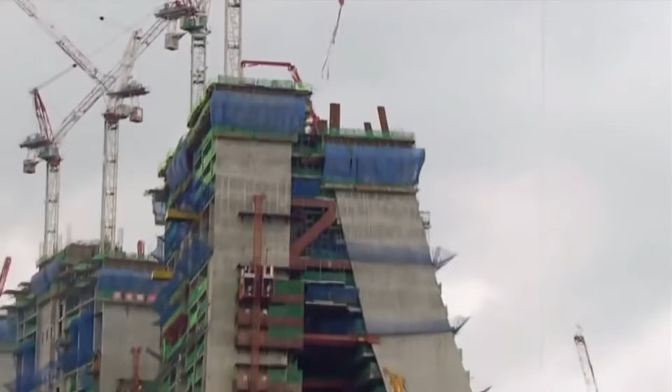During the construction of Marina Bay Sands in Singapore, engineers had to face a challenge that they had never imagined. According to the building design, a sky park was going to be built on top of 3 towers, whose size was supposed to be larger than the US Navy's Nimitz aircraft carrier.

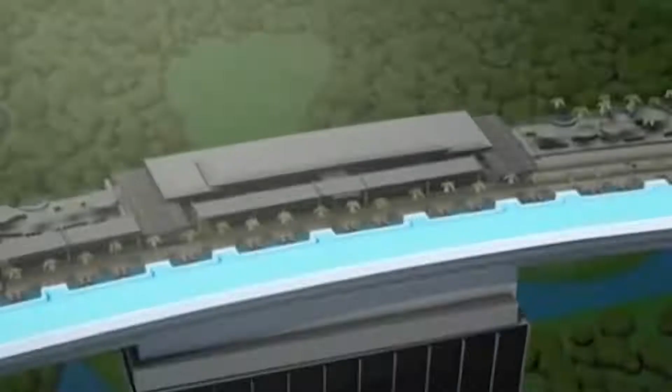And when it was time for the construction of the sky park, engineers found a major fault in the building design. The fault was that the 3 buildings might swing up to 200 millimeters during a tornado. And if the sky park was built despite this fault, then the swimming pool filled with 15 lakh liters of water might get cracked, and the destruction that it would cause is unimaginable.

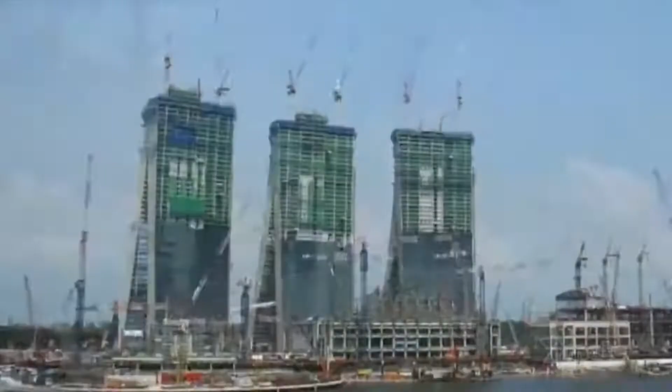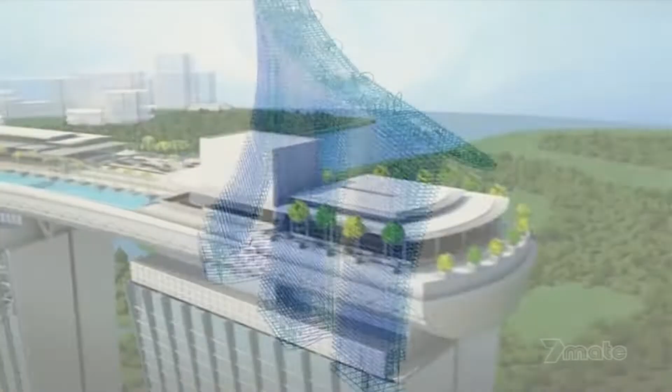On the one hand, years of hard work and millions of dollars were spent on this project, and on the other hand, dropping the idea of the sky park would be like compromising the beauty of the entire structure. They needed to find a solution which would keep the sky park safe despite the swinging of the building during strong winds. This was such a serious issue that the entire construction and architecture team was anxious.

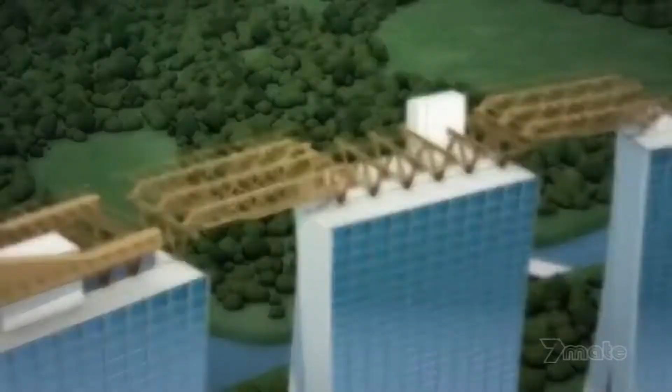But a miracle happened. Singapore is a country which has only one city, and that is Singapore. The entire country is so small that it is slightly larger than the Indian city of Mumbai and a little smaller than the Pakistani capital Islamabad. Singapore's Marina Bay Sands is one of the most complicated construction projects in the entire world, and that's why it is called an engineering masterpiece.

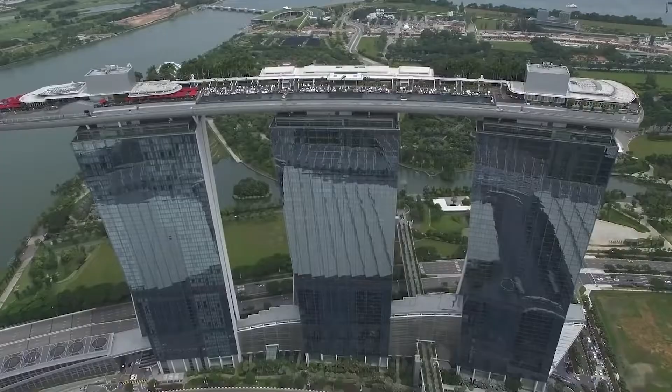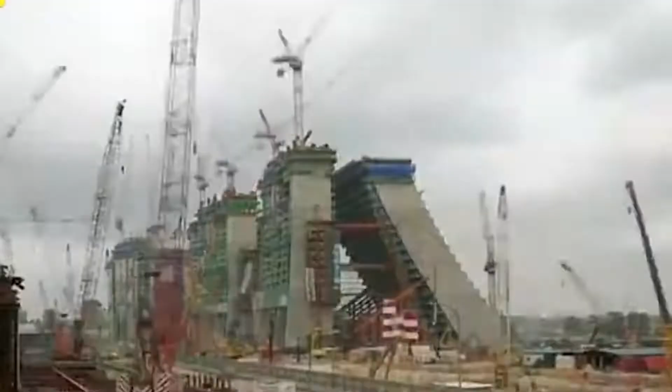Engineers had to construct not 1 but 3 buildings, buildings whose one portion was going to be bent, and that too taking support from the other portion. In the project costing $8 billion, 3 buildings 680 feet high and a sky park bigger than an aircraft carrier were going to be constructed, and that too above the water. For the cost at which Marina Bay Sands was built, 5 Burj Khalifa-like buildings could have been made. And the labor needed to make this masterpiece was an astounding 16,500 workers who worked together.

Construction workers and engineers faced many challenges, from laying the foundation on soft wet soil near the seashore to constructing a curve-shaped structure and a unique sky park over it. This was not only the first challenge of their life, but no construction project in the past had faced this kind of challenge. Let's come and see the challenges and their solutions.

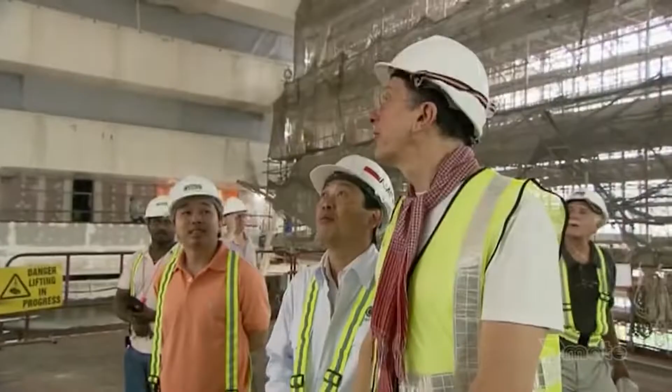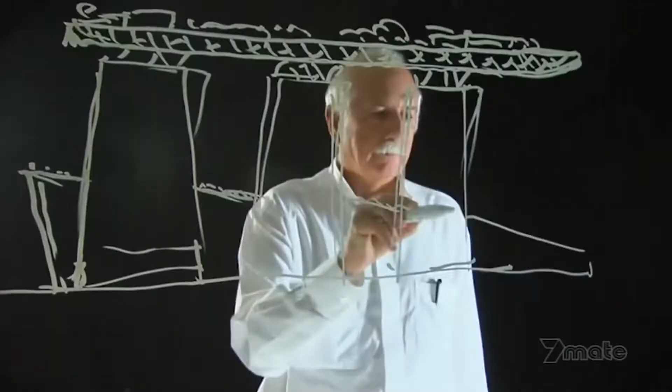Challenge number 1. It was American business tycoon and owner of Las Vegas Sands Corporation, Sheldon Adelson, who was behind the project, who has often been featured in Forbes' richest list. Adelson wanted to build a project that would become the identity of Singapore. And obviously, for such a project, its design had to be very unique. For this purpose, there was no better option than an architect like Moshe Safdie, whose curved designs are mind-boggling, but difficult to construct.

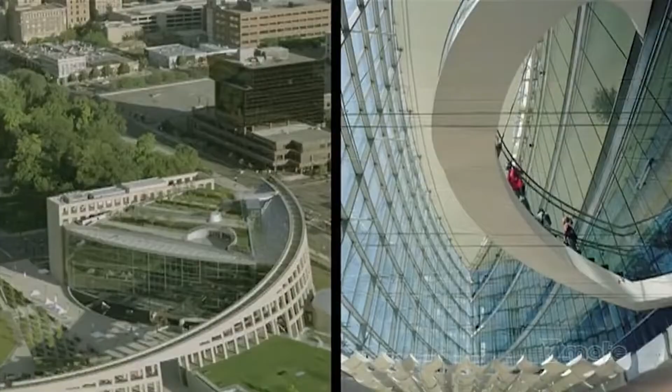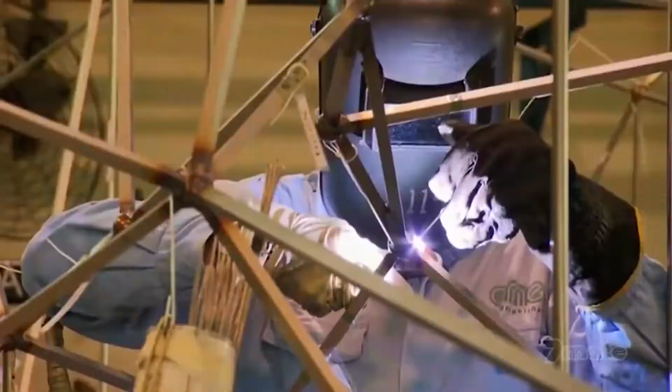After months of hard work, Safdie presented his design. But this design presented a big challenge for the construction team. According to the construction team, it would take at least 7 years to complete the project. But Sheldon Adelson wanted to complete the project within 3 years. In these 3 years, the entire project with the 3 towers, its interior, museum, floating pavilion, and the most complex sky park needed to be built. Accepting the challenge was a big achievement for the construction team in itself.

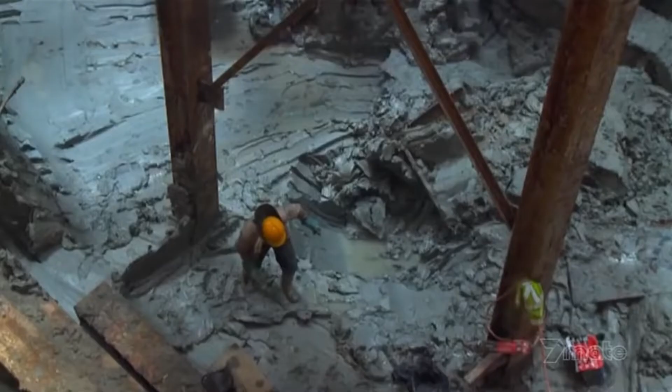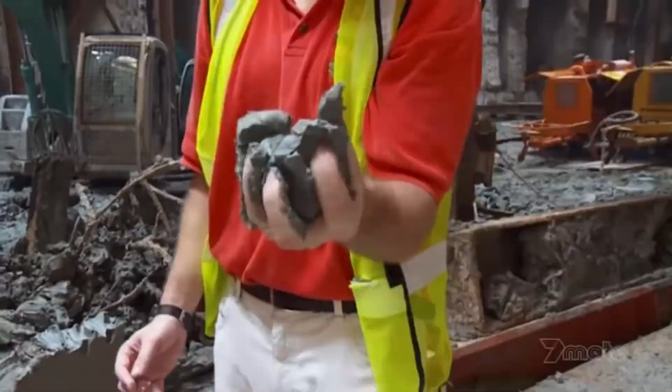Challenge number 2. The site chosen for the construction work was full of soft clay due to the proximity of the sea, which engineers call marine clay. Marine clay is very soft, and it's very hard to walk over it, let alone construct something. And if marine clay is not treated correctly, it can prove disastrous, which was evident in Singapore's Nicoll Highway case. A feature of marine clay is that if some of the clay is removed using an excavator, the clay surrounding the ditch fills it quickly.

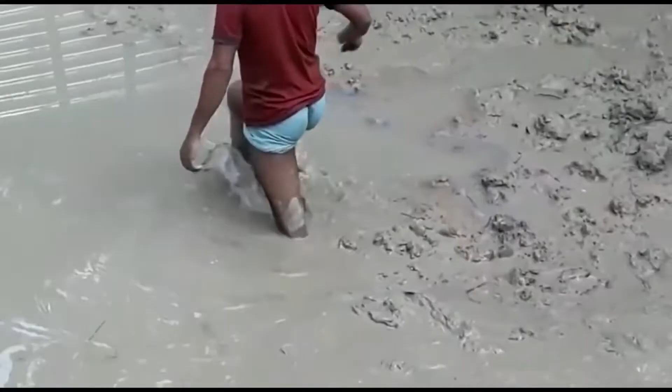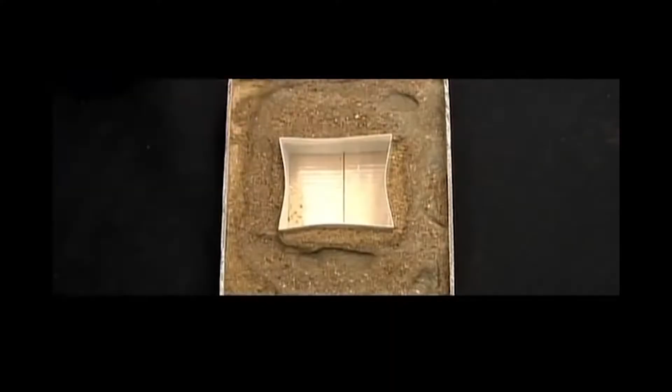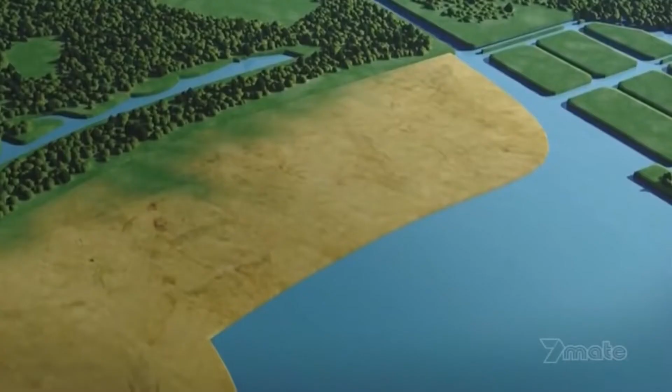Therefore, it was necessary to find a solid solution so that the clay surrounding the ditch is not able to fill it. To address this issue, engineers decided to build a concrete wall of 1.5 meters thickness, which is also called a diaphragm wall. And with the help of excavators, the marine clay was removed inside it. It took engineers 1 year to remove the marine clay. Now they were left with 2 years to complete the project.

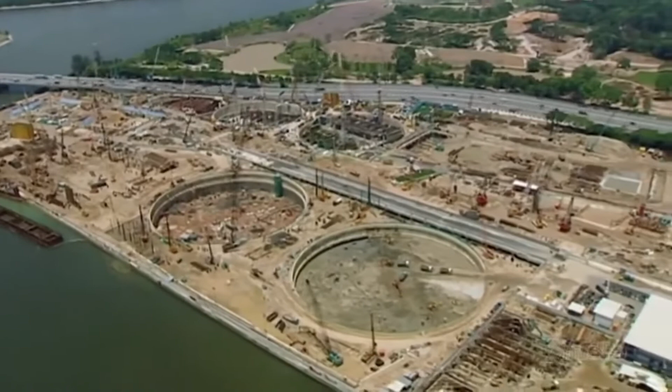Challenge number 3. After getting rid of the marine clay, engineers were left with only 2 years to complete the entire Marina Bay Sands. And this was really a very difficult task. The engineering team didn't budge and decided to construct every part of the project simultaneously. But for that, a large number of workers was required.

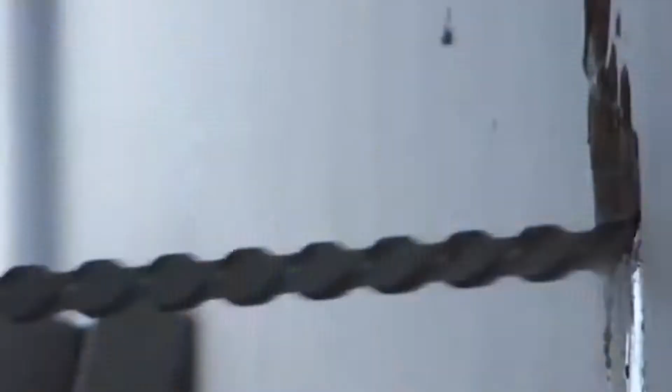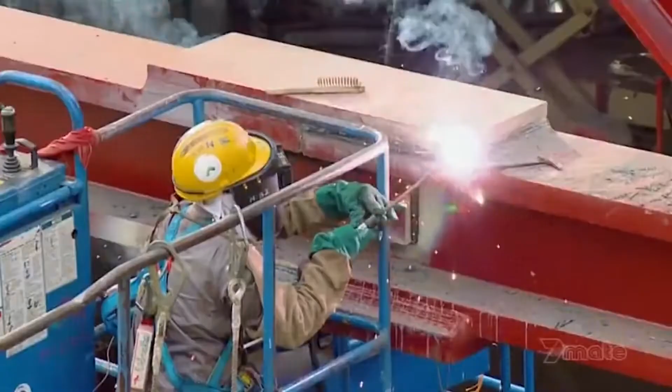A mind-boggling 16,500 workers were hired to work day and night, in shifts. It was a daunting task to manage this army of workers and provide them food. For this purpose, the world's biggest canteen was made. In this canteen, just for preparing one meal, $82,500 was spent. Challenge number 4.

The complication for the construction of the 3 towers was that one portion was straight and the other was curved at a certain angle, and both parts would stand in support of each other. On paper, it looks easy, but practically building this was a challenge; nobody had ever tried anything like this before.

It was on the 23rd floor where the curved portion met the straight building. There, with the help of a heavy steel truss, both the portions were joined, and the steel frames were removed.

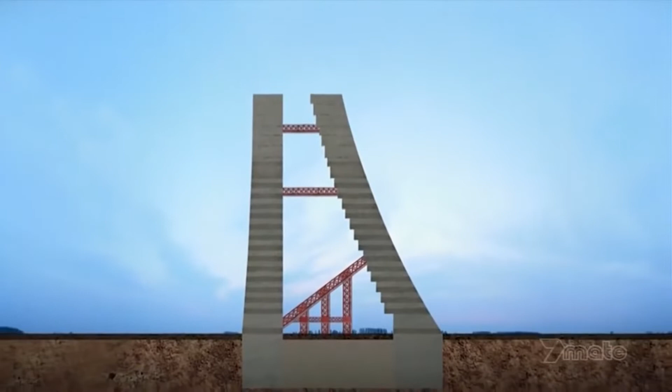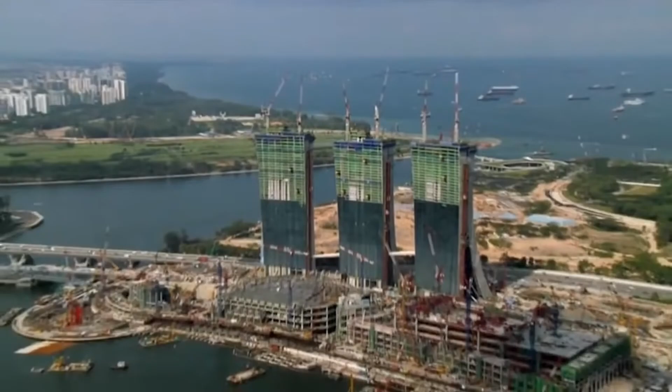Challenge number 5. The construction of 3 buildings of the Marina Bay Sands, the ArtScience Museum and Floating Crystal Pavilion was completed, and their finishing work was going on. But one portion was still left to be constructed, and that was the Sky Park, which needed to be constructed on the top of 3 towers. And the engineering team had 6 months to complete this task.

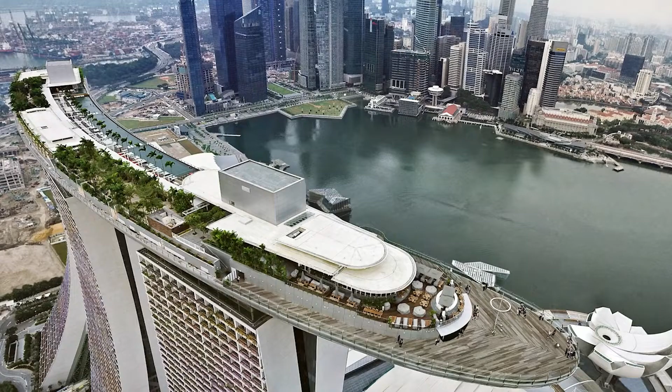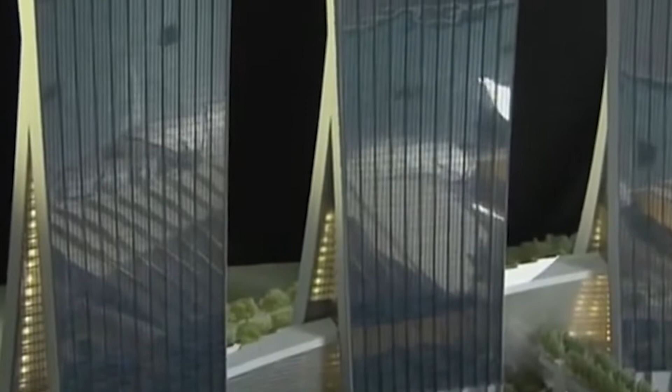Almost all the luxury hotels and resorts in the world have a lot of open space, along with all the facilities where gardens and pools are constructed. But as the Marina Bay Sands was being constructed in a very congested area, it doesn't contain any open space. Therefore, while designing, it was decided to have a large sky park at the top of the buildings, which will host a 150 meters long infinity pool, gardens, open-air restaurants, a yoga center, and an observation deck to witness a 360 degrees view of Singapore.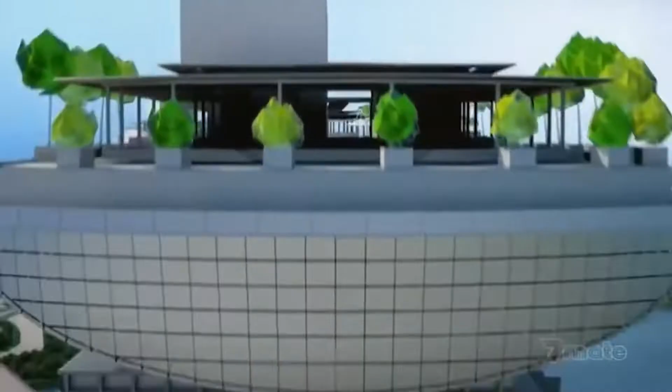But the moment the Sky Park was about to be constructed, the engineers detected a major fault, which resulted in the delay of the construction of the Sky Park. All the 3 towers were built independent of each other, that is, there was no connection between them. That's why engineers believed that during strong winds the buildings might swing in different directions. And if the Sky Park is constructed despite this, it could be disastrous.

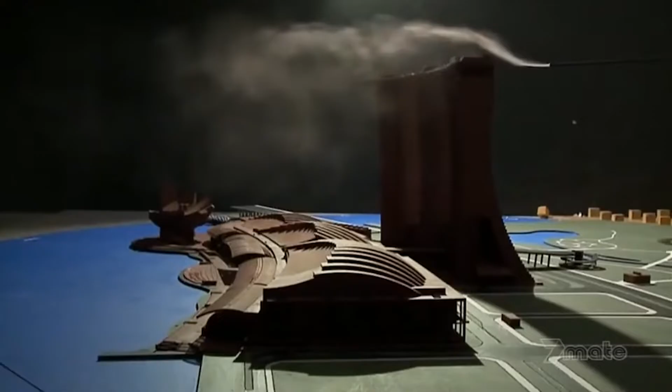To assess this risk, a wind tunnel test of the project model was required. With the help of wind engineering company CPP, pressure sensors were attached to the weak points of the model, and it was tested against an artificial typhoon. Unfortunately, the result was positive. Wind engineers revealed that during a tornado the top of the 3 buildings might swing up to 200 millimeters, almost like the length of a mobile or a little more. It doesn't seem a big swing.

But the nature of concrete is that it is not flexible. A little bit of pressure can crack the concrete. If the Sky Park is built disregarding this risk, then during storms cracks might appear in the 150 meters long infinity pool, and eventually a portion of the Sky Park might collapse.

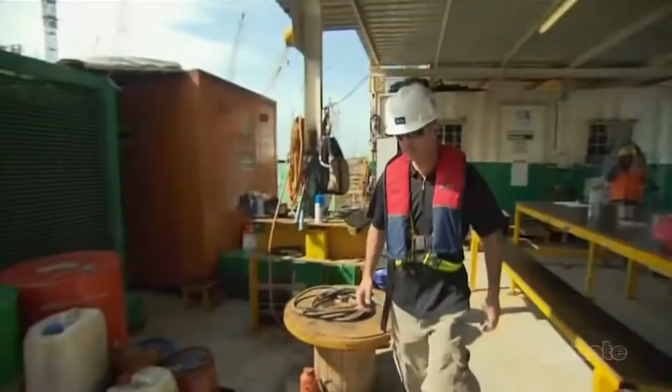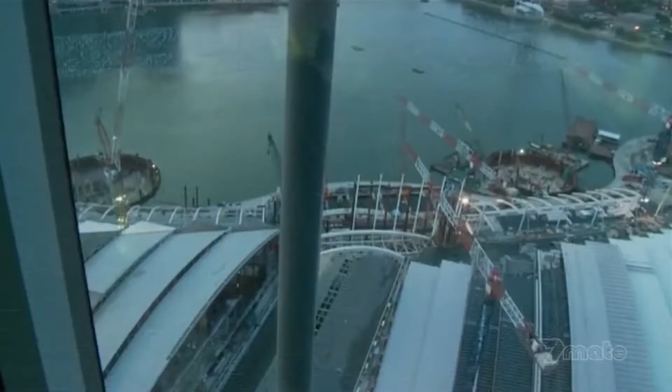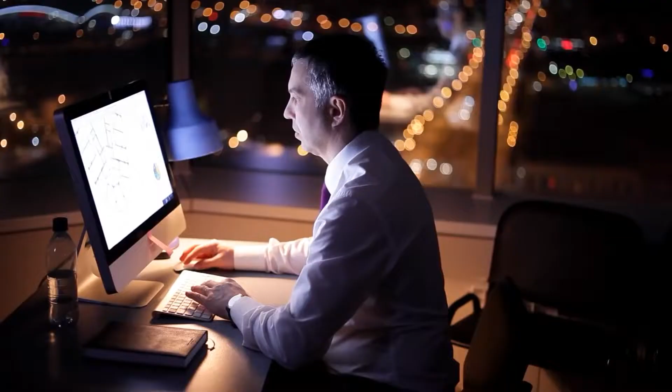The news was depressing for the entire construction and architecture team. On one hand, there was 1.5 years of hard work of 16,500 workers, whereas on the other hand millions and millions of dollars were spent. For the past 1.5 years, workers, staff and engineers became emotionally attached to the 3 towers. Therefore, it was not an option to break and rebuild the entire structure once again. Engineers had to find a solution to keep the Sky Park safe despite the swinging. After months of brainstorming, a solution was found.

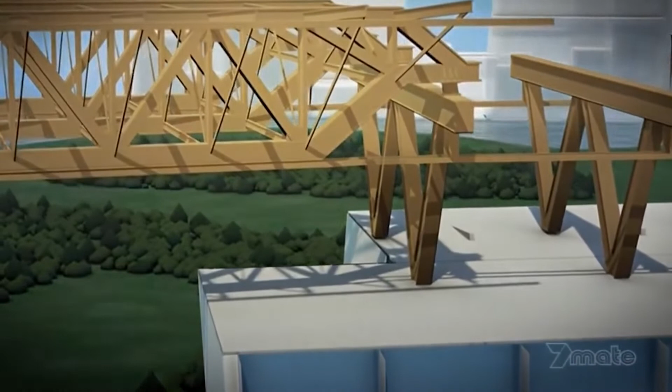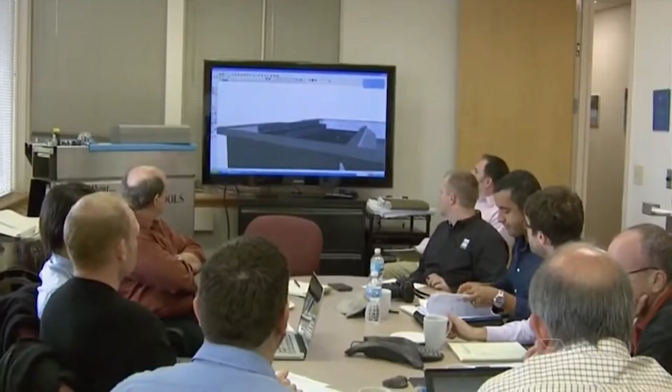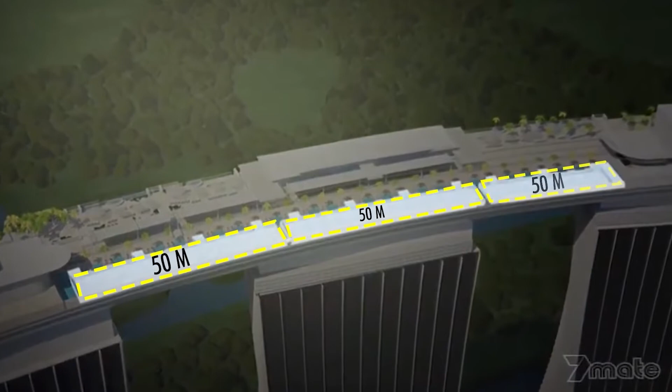Utilizing bridge engineering technology, it was decided to introduce movement joints, where the entire Sky Park will be built upon a steel bridge laid over the 3 buildings. Special movement joints in the steel bridge could absorb up to 250 millimeters of movement. Everyone understood the solution, but for that, it was necessary to build the Sky Park in 3 different parts. That is, now it was not possible to build a 150 meters long infinity pool. Engineers decided to divide the infinity pool into 3 sections of 50 meters each, and some space will be given in between them for movement.

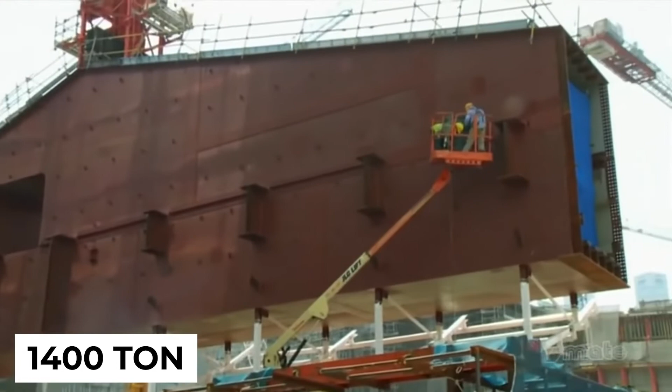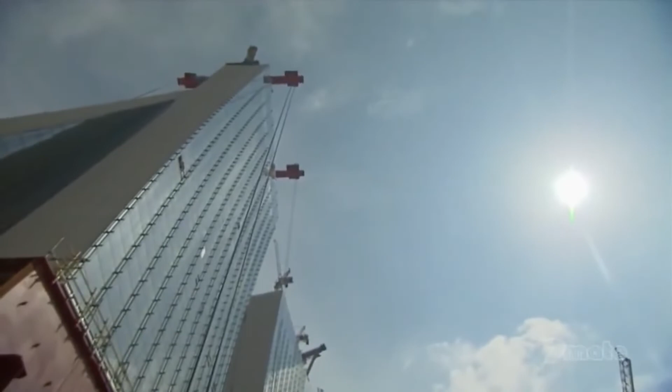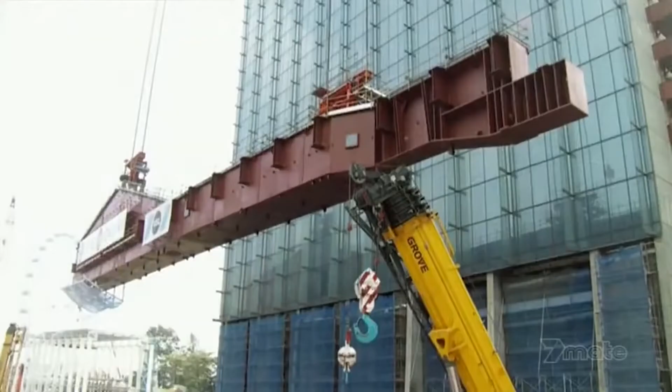Challenge number 6. In total, 1,400 tons of steel was needed in the construction of the Sky Park. That is a weight similar to 2 Antonov 225 Mriya, the world's biggest cargo plane. It was impossible to transport this much weight to the top. Therefore, it was decided to divide the construction of the Sky Park into 14 segments and assemble them on the top. To carry the 14 big steel structures to the top of the tower, the world's biggest lift was installed with the help of Swiss-French company VSL, which would carry one segment to the top in 16 hours.

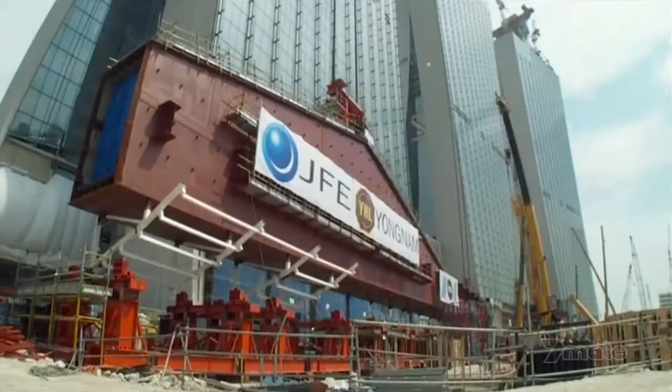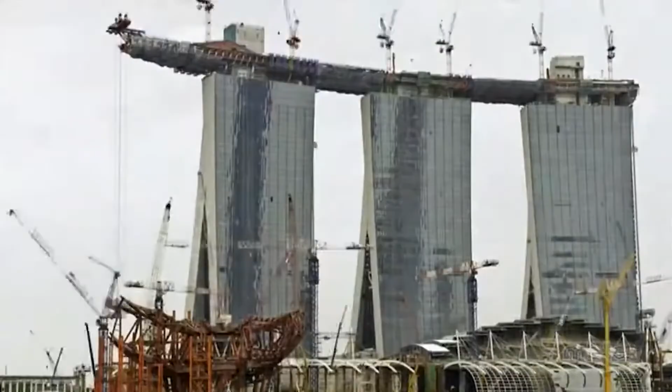As soon as the lifting process started, the danger of sea storms started lurking. This hanging 100-ton steel structure could damage the building by swinging in the storm, and it could also fall down. The lifting process started in the morning, was suspended for many hours due to a storm, and finally by midnight it successfully reached the top. Similarly, one by one every 100-ton steel structure was lifted, and the Sky Park was completed by assembling them. Instead of 2009, construction of Marina Bay Sands was completed in 2010, with a delay of 1 year, owing to the Sky Park.

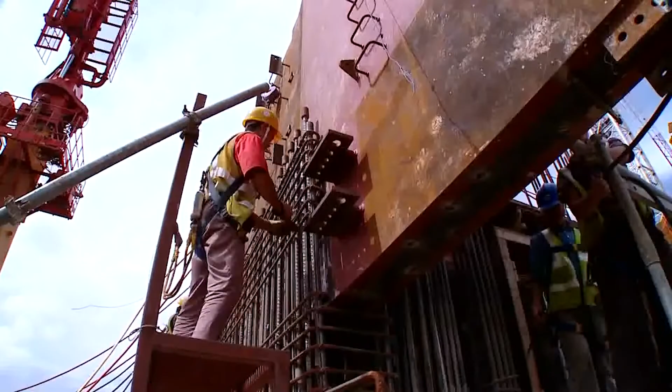Today Marina Bay Sands hosts lakhs of visitors daily, but the hard work of 16,500 workers to build this masterpiece will always be remembered.